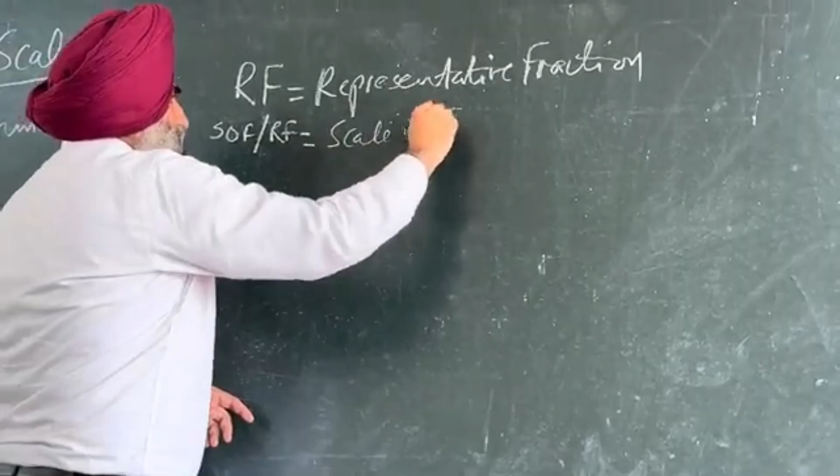In some of the books you will find the representative factor also. There is another term, SOF. SOF is the same thing. SOF and RF are one and the same thing. But SOF is scale of factor. This decides which type of scale is there. So this is the normal size.

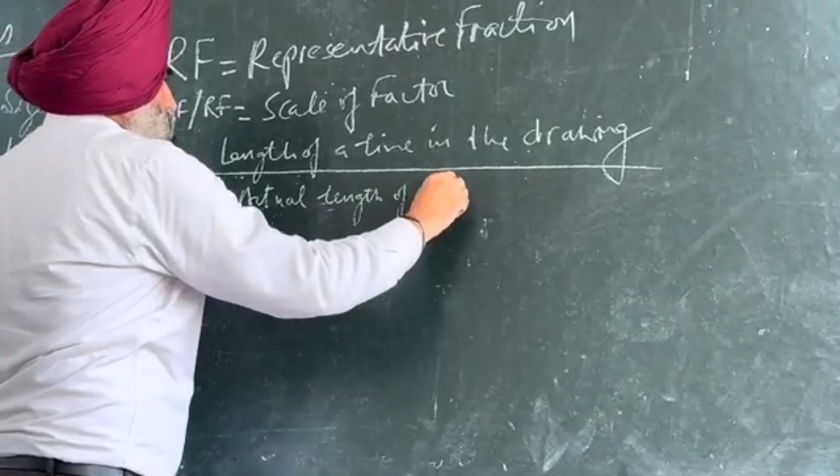Normal size, RF, this is the definition of RF: length of a line in the drawing to the actual length of the object.

Actually this 1:1 is 1/1. Am I right or wrong? It's also called 1/1. What is 1? 1 means length of a line in the drawing. What is on the right hand side of this dot? It's a ratio - this is the actual length of the object.

If I say 100:100, it is nothing but basically 1:1.

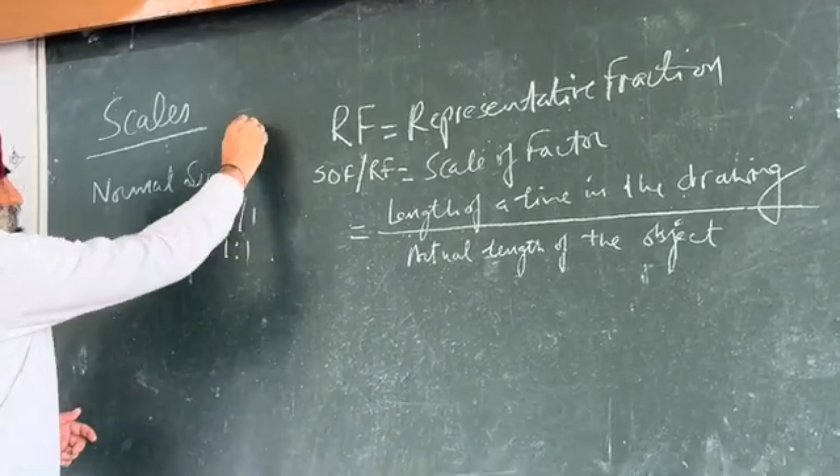And so far what we have discussed, what is the minimum dimension which can be measured with the help of a drafter? Minimum dimension is millimeter. And if you write down capital M, this becomes mega, 10 to the power 6. So please don't write capital MM. This is small mm, millimeter.

This is the representation by which you can make use of mm. Another size, another one, then reducing size or reducing scale. What is that?

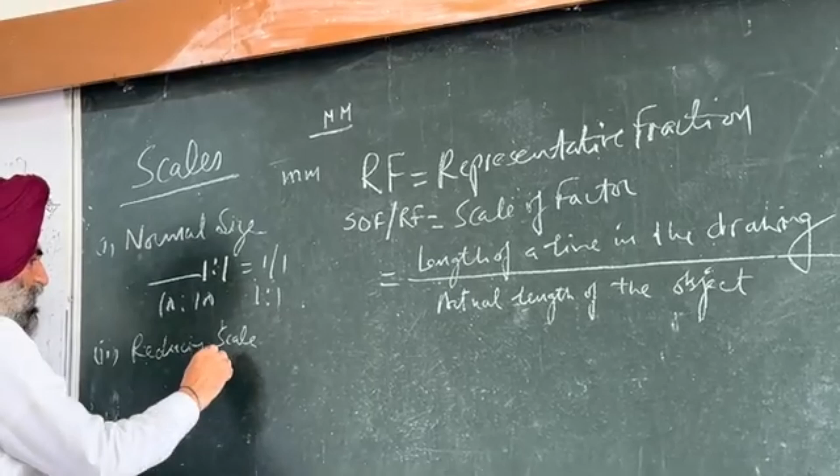This is 1:x, where x is greater than 1. Let us assume I write down 1:2. Here x is greater than 1. Is it okay? What does it indicate?

It indicates that length of a line in the drawing is 1 and actual length is 2. Basically, your actual length is 2 times that of the length of a line in the drawing. So here we make use of a reducing scale. And the third one, if I write down 1:100, what does it indicate?

Length of a line in the drawing is 1, actual length is 100. If it is 100 centimeters, it is represented by 1 centimeter. Is it okay so far? Does anyone have a doubt?

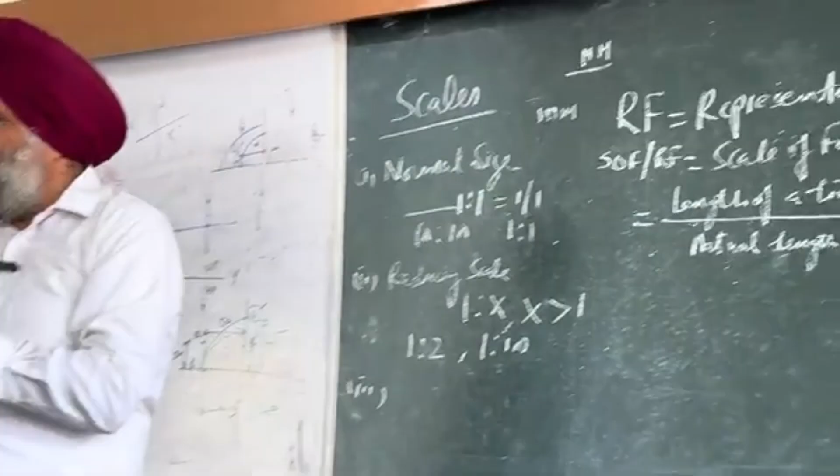Another thing is called enlarging scale, or enlarging representation, or enlarging size. You can use any of these words here.

X ratio to 1, where x is greater than 1. If I write down 2:1, what does it indicate? It indicates that length of a line in the drawing is 2 and actual length is 1.

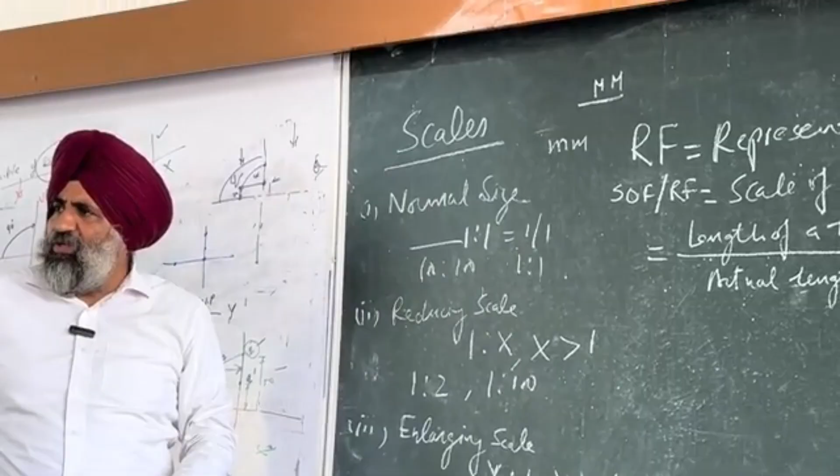Very limited, you will make use of this enlarging scale. When do we use the enlarging scale? When we have a very small dimension, and you are left with more space available on the sheet, in that case you can make use of this enlarging scale.

Now here, if I write down 100:1, what does it indicate? Length of a line in the drawing is 100, actual length is 1. This is a very, very important definition.

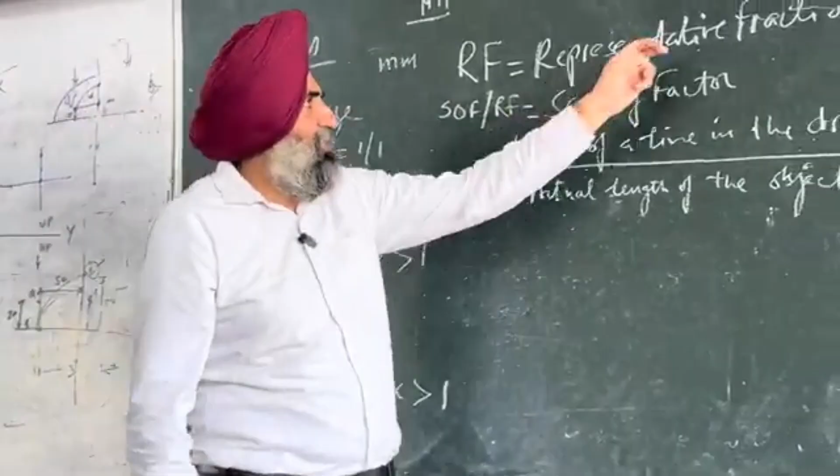Representative fraction. In some books you will find representative factor also, but this is basically a representative fraction or scale factor. This is one and the same thing - length of a line in the drawing to the actual length of the object. There are two things which are important in the case of scales.

There are 6 types of scales which are there. There are 6 types of scale which are there. One is plane scale.

Another one is diagonal scale.

Another one is comparative scale.

Another one is Vernier scale.

Another one is isometric scale.

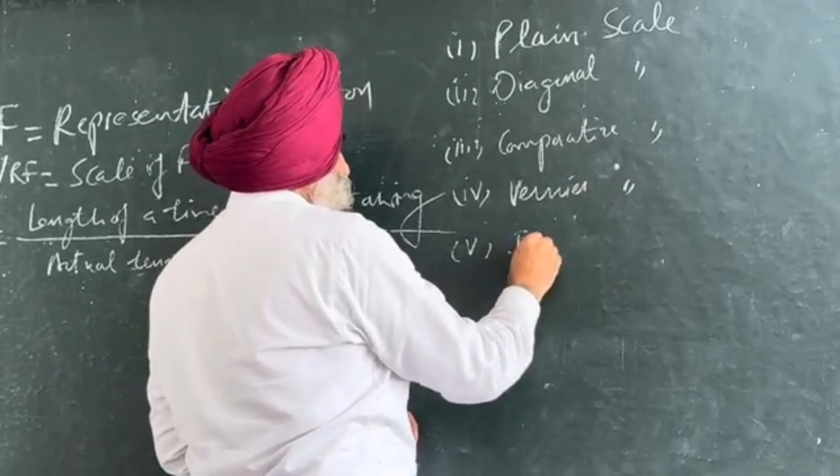Another one is scale of chord. We'll discuss only the first two in our class.

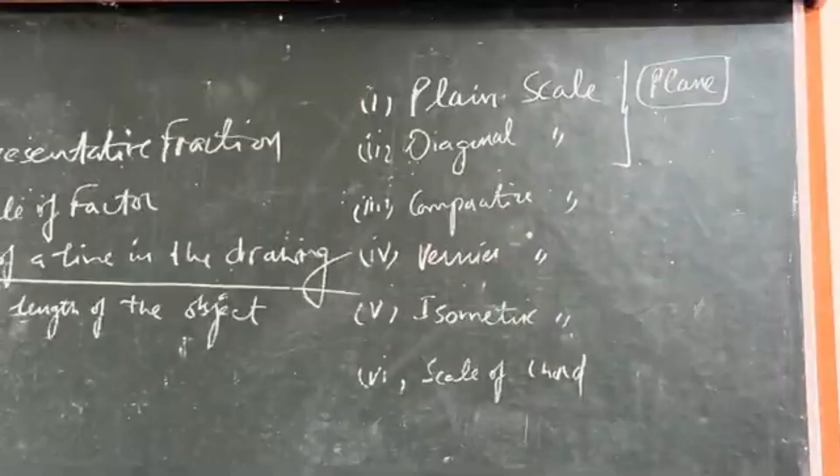We'll discuss these two in subsequent classes. Today, don't write down 'plane, plane scale' confusedly. This is 'plane' (flat), this is 'the plane' (geometric plane). So we'll discuss the first two in our class.

The rest are not in our syllabus, but if you are interested, we'll share the information with you later on also. Now, in plane scale, if you are going to measure meter, centimeter...

If you are going to measure up to 2 units - meter, centimeter, or meter, basically meter, decimeter, centimeter, millimeter - at a time you are choosing only two: meter-decimeter, or decimeter-centimeter, or centimeter-millimeter. Then you can use plane scale.

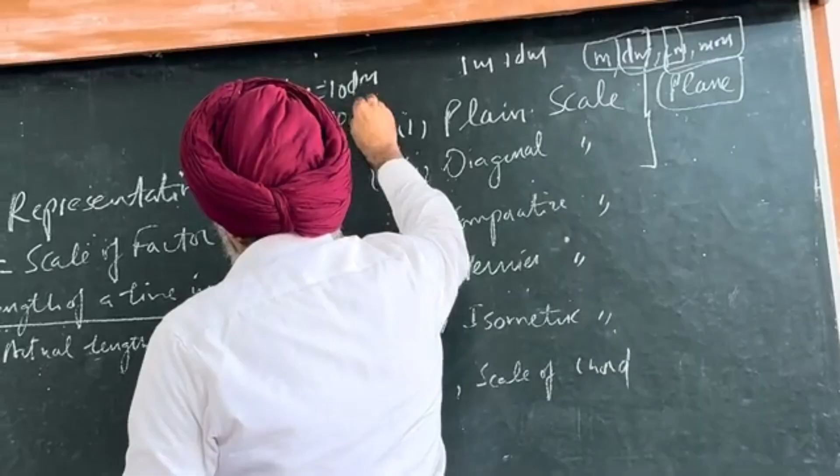Is it okay? 1 meter equals 10 decimeters. 1 decimeter equals 10 centimeters. 1 centimeter equals 10 millimeters.

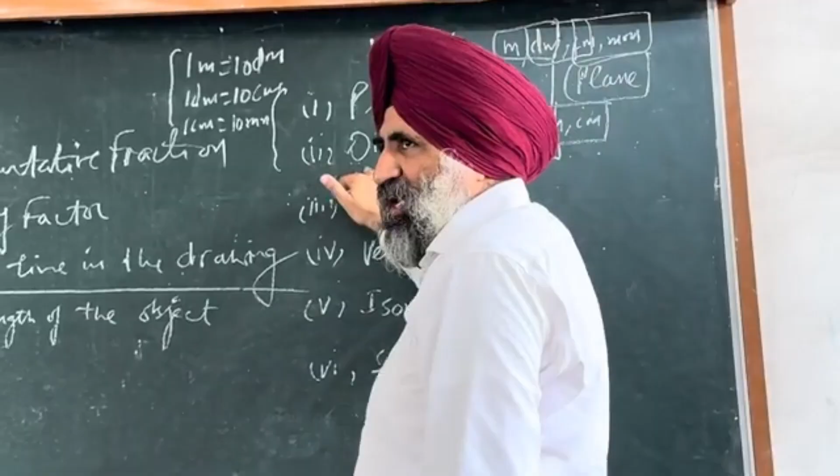If you look here, only two dimensions are used: meter-decimeter, or decimeter-centimeter, or centimeter-millimeter. So here you can make use of the plane scale. Another thing, if the dimensions are meter, decimeter, centimeter - you are using three components simultaneously, meter, decimeter, centimeter - here you make use of the diagonal scale.

Or decimeter, centimeter, millimeter - again this will make use of a diagonal scale.

And when you are doing the comparison between time and distance, when we are making the comparison between time and distance, you can make use of the comparative scale.

This isometric scale - iso means equal, metric means measurement. When we are going to measure all three dimensions, length, breadth and height, that becomes the isometric scale. The beauty of this one is you will get all three dimensions, length, breadth and height, in a single scale - that is called the isometric scale.

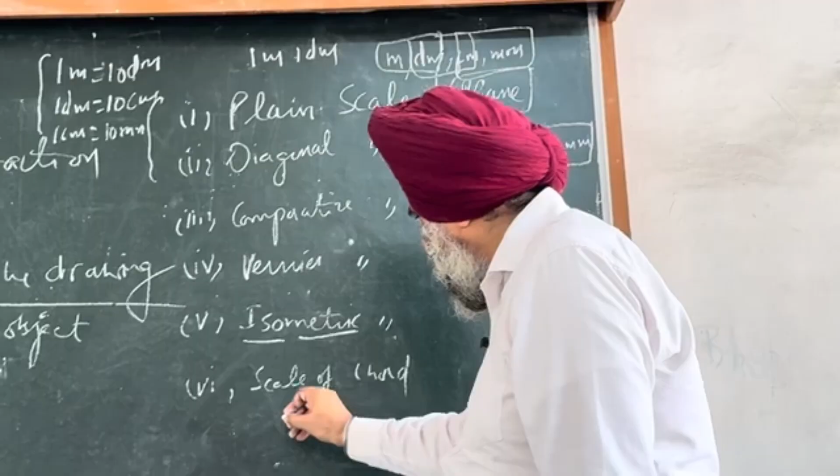Scale of chord - what is a chord? If you look at this circle, if you take 2 points on a circle and join it with a straight line, and this straight line should not pass through the center of the circle, this is called scale of chord.

And if I put down the AB symbol like this, this becomes the arc. So this is the difference - here you can make use of the scale of chord. This is the basic principle.

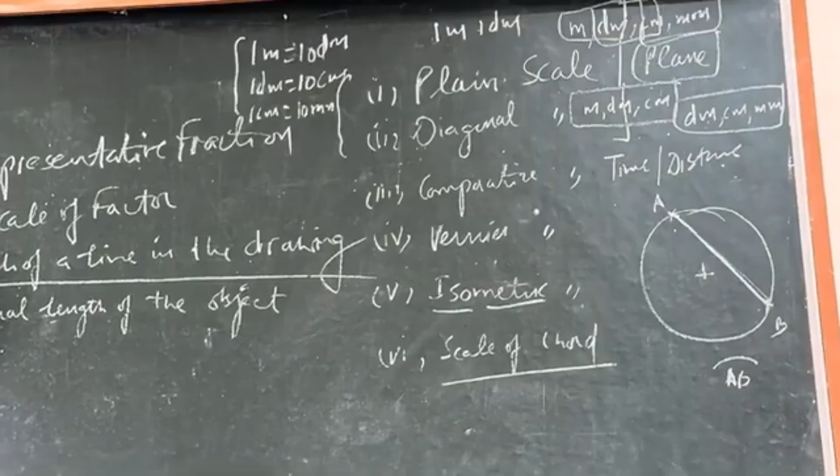In detail we will discuss this plane scale and diagonal scale. Is it okay? So how to draw plane scale and diagonal scale, we'll take one or two examples each.

May I erase it? And you can write down one problem related to that. Please write down one problem related to that, it will help you a lot. Construct a plain scale: construct a plane scale of 1 centimeter is equal to 0.5 meter.

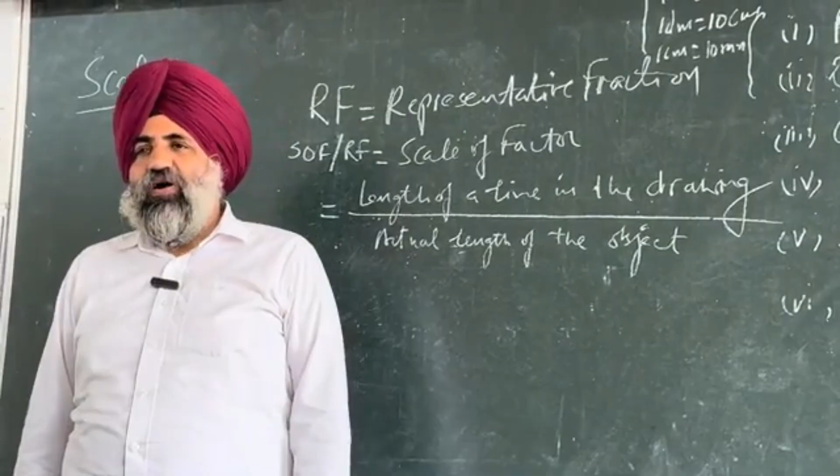Construct a plain scale of 1 centimeter is equal to 0.5 meter to show single meter, single decimeter, and long enough to measure up to 8 meter. Show a distance of 7 meter 5 decimeter and 6 meter 3 decimeter on it. Now how to solve this problem?

First of all, this is a plane scale problem. It is clearly mentioned this is a plane scale. Construct a plain scale. There are two things which are important before drawing any scale. First of all, you need to calculate RF. RF is nothing but basically the representative fraction.

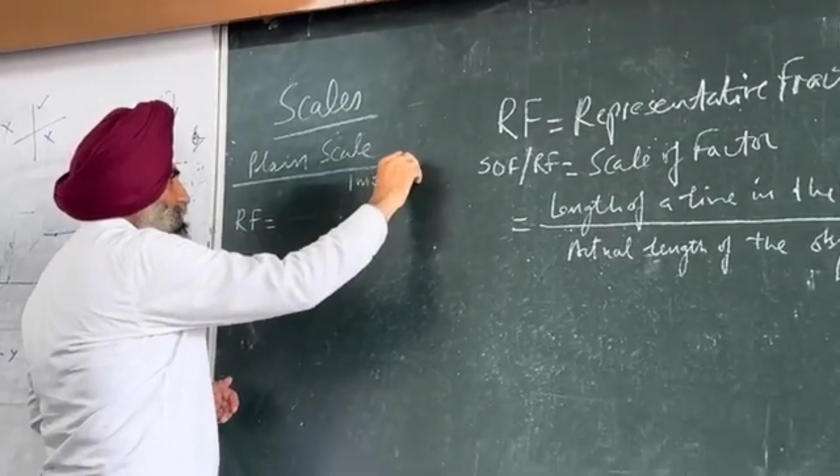Here 1 meter is equal to 0.5 meter. Now here basically this becomes 1 over, you will convert into this one, 1 over 0.5. Sorry, I have mentioned 1, not 1 meter. This is 1 centimeter is equal to 0.5 meter. 1 centimeter, it represents 0.5 meter. So what to do? 1 centimeter equal to 0.5 meter. 1 centimeter is equal to 0.5 into 100.

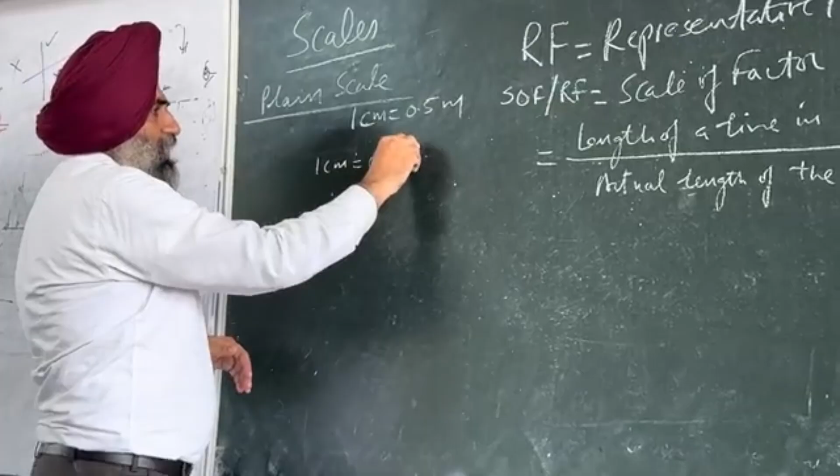Now both the units are same on both sides, is it okay or not? So here you will get 1 centimeter is equal to 50 centimeter. So your RF will be 1 over 50. Your RF is 1 over 50.

And what is LOS? This is called length of scale. This is the second parameter which is important. And the formula of length of scale is equal to RF into maximum distance to be measured.

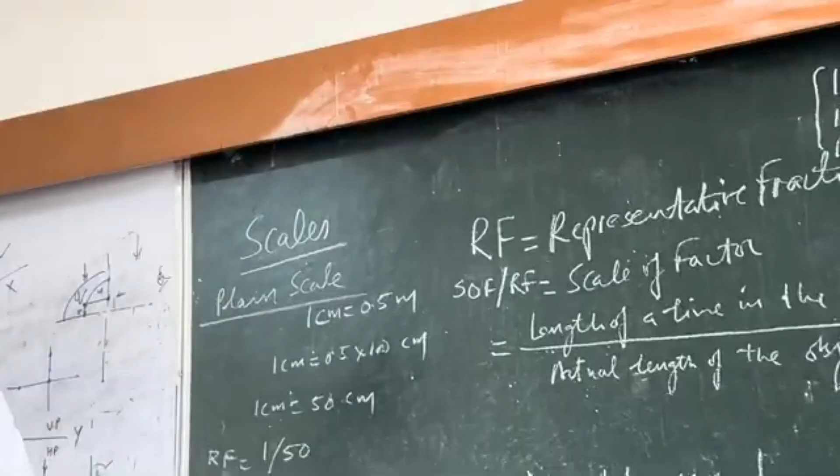And what is RF? 1 over 50. And here maximum distance to be measured is 8 meter. Into, what are the units of RF? No, this gets cancelled, centimeter gets cancelled with centimeter. So there will be no unit. This is the important part. There will be no unit of the RF.

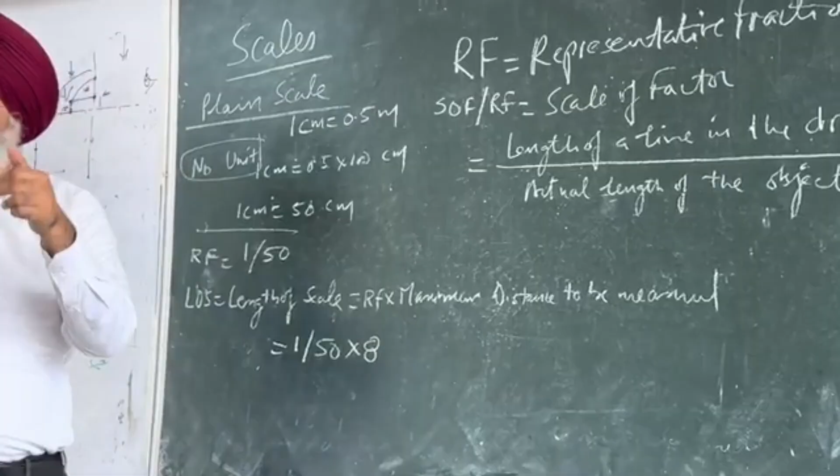It is applicable in all cases. And if this RF has no unit, what is the unit of this one? 8 meter. Can I measure meter value with the help of drafter? Does your drafter support the meter value? Your drafter does not support the meter value. What is the value it is supporting? Centimeter or millimeter. It is better if I multiply with 100.

It becomes the centimeter. If I keep on calculating, it becomes 16 centimeter. Now what do you have to do? First, may I rub it? Okay, I'm going to rub this one.

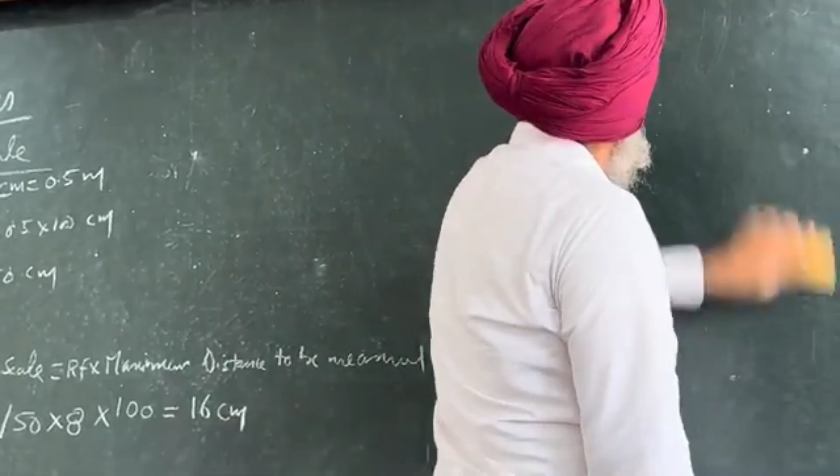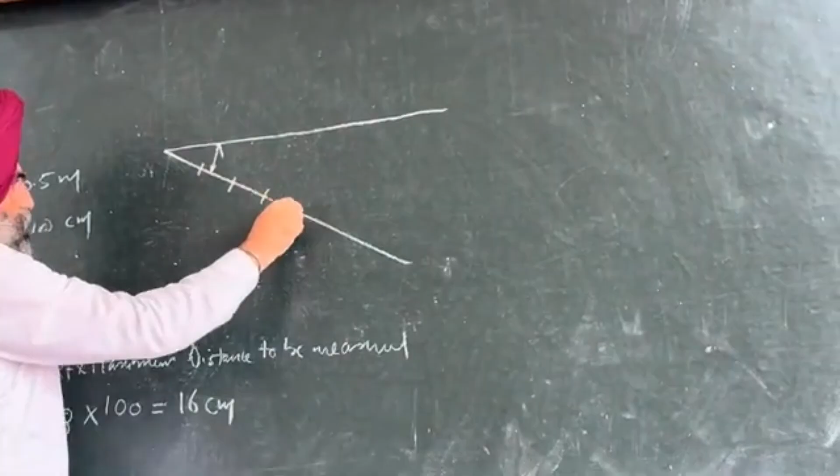Take a 16 centimeter line. Draw an acute angle. What is the beauty of acute angle? It is always less than 90 degree. And divided into 8 equal parts: 1, 2, 3, 4, 5, 6, 7, 8. Is it okay or not? Join this last part with this last one.

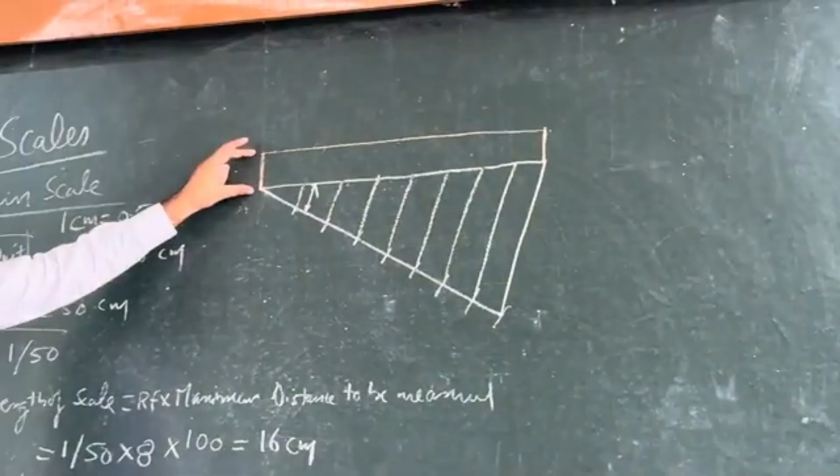Your drafter will be set parallel to this one. Draw rest of the line. Clear? Now here, take 1 centimeter or 10 mm. Basically it will look like a shape like this one. This is 1 centimeter or 10 mm. You will have a scale like this one.

Another thing, from here, drop the perpendicular. This is basically a perpendicular. Do it for all the points. Now what happens?

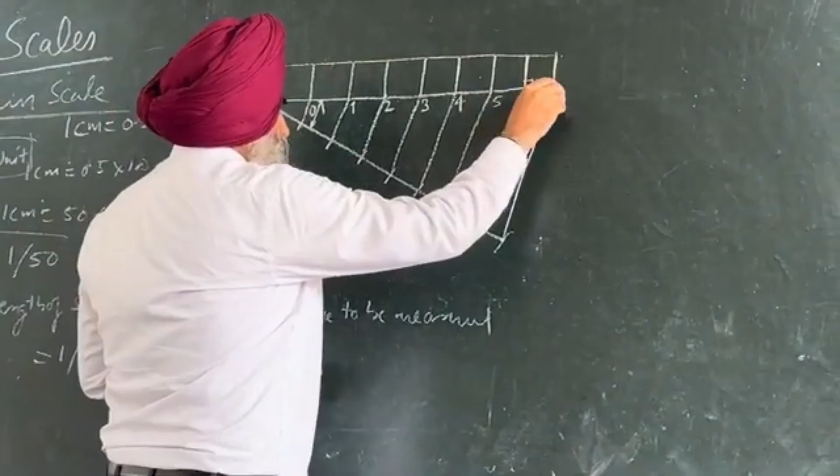If I do the numbering system from here, this is 0, 0 meter, 1 meter, 2, 3, 4, 5, 6, 7. It is in meter. It is clearly mentioned here. Can anybody read me the same problem again for me?

Construct a plain scale of RF 1 centimeter is equal to 0.5 meter to represent single meter and single decimeter, and long enough to measure up to 8 meter. Also show the distances of 7 meter 5 decimeter and 6 meter 3 decimeter. This is what I have asked.

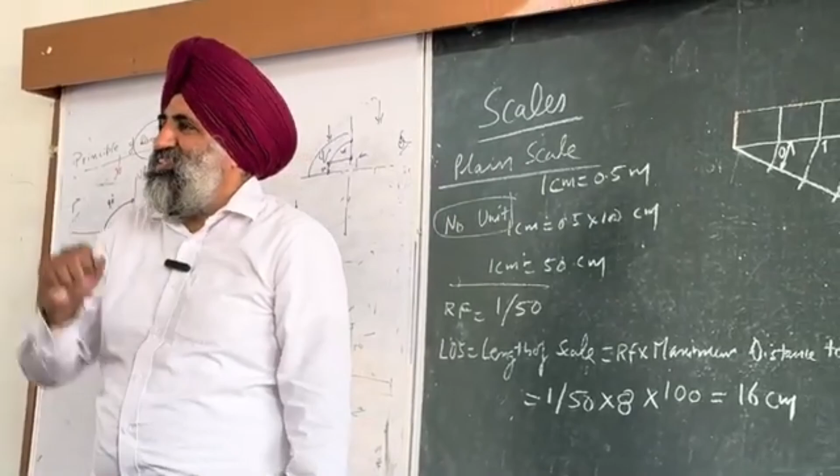Then divide this line into 10 equal parts. 1, 2, 3, 4, 5, 6, 7, 8, 9, 10.

When I join this point with this line, why have I started 0 from here? If I start the 0 from here, now I can measure all the dimensions varying from 0 meter to 8 meter, representing single meter and single decimeter. If I start 0 from here, I am going to measure only 8 meter.

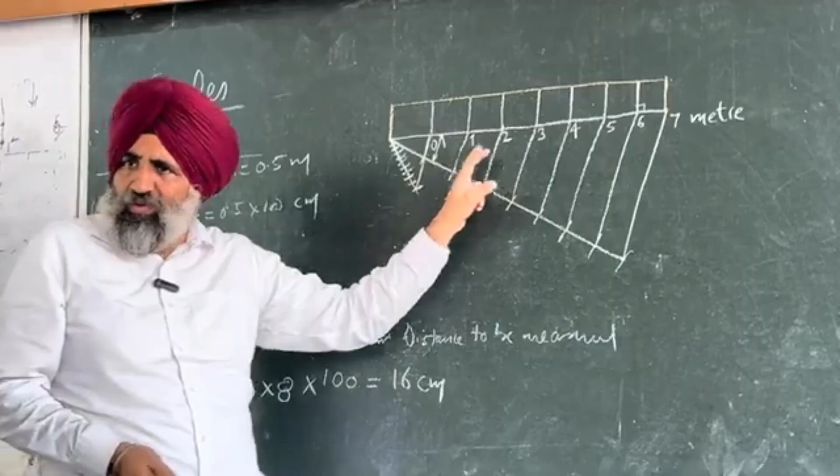So that is why we will always start 0 by leaving one block blank. We will give the numbering from here: 0, 1, 2, 3, 4, 5, 6, 7, 8. Now this is the line. Your drafter will be fixed according to this line. You will have parallel lines according to this one.

How many lines will be there? 10. Why? Because it represents a single decimeter. If I keep on joining single decimeter 10 times, what will happen? It will become 10 decimeter, and 10 decimeter is equal to 1 meter.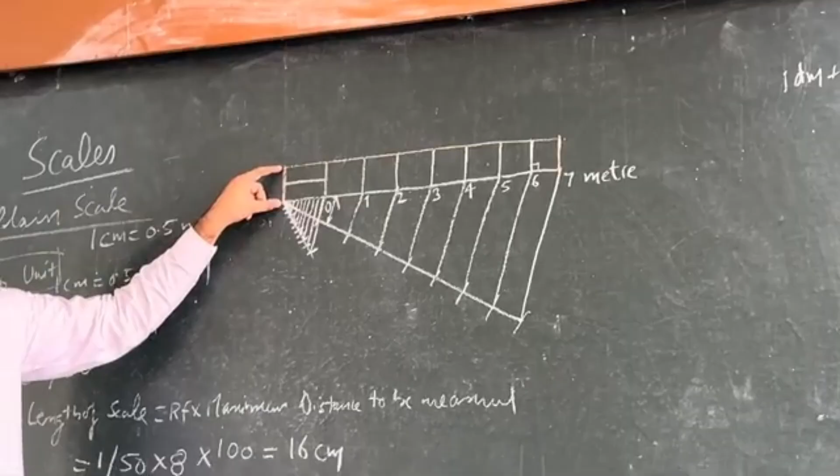So you will put a center line in between, dividing this into 2 equal parts. Now you will have a line like this one. Make again the perpendicular lines from these points.

These are 10 in number. Another thing, this represents your meter, single meter. When I divide into 10 equal parts, this becomes 10 decimeter.

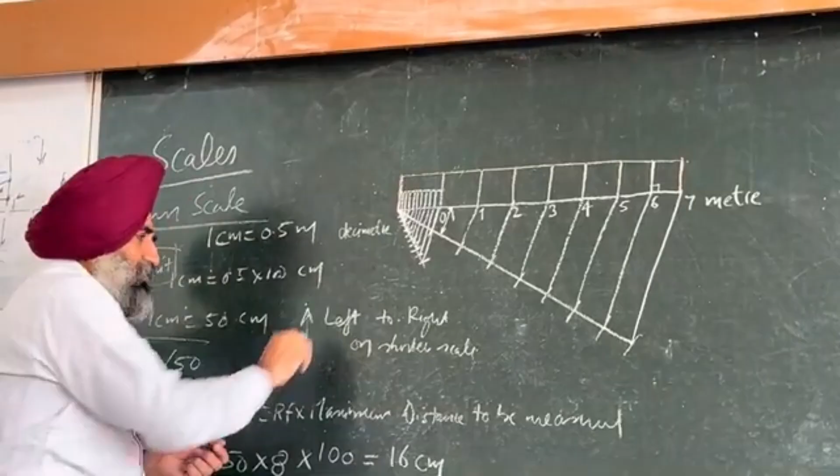When I move from right to left on the shorter scale, the value will increase. When I move from right to left on a shorter scale, your value will increase.

This is 1 decimeter, 2, 3, 4, 5, 6, 7, 8, 9, 10. You will have 10 lines: 1, 2, 3, 4, 5, 6, 7, 8, 9, 10.

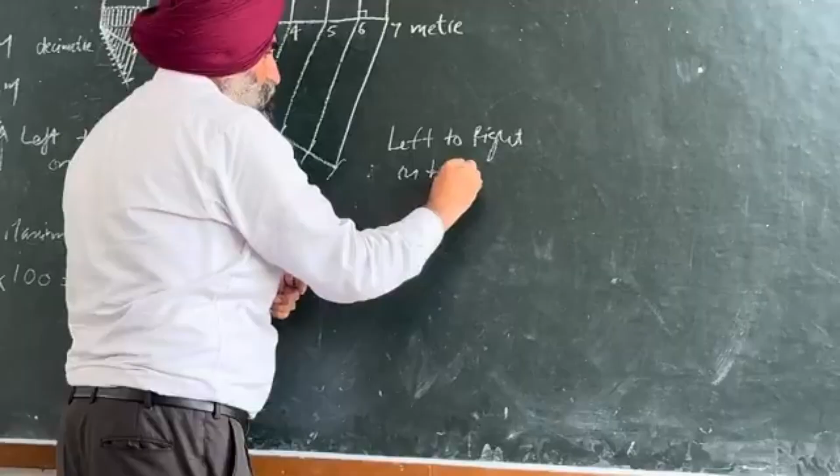Similarly, when you move from left to right on the bigger scale, your value will increase. 0 is here, 1 is here, 2 is here, meaning it is increasing.

This is from right to left. This is from right to left. I have mentioned right to left. Now look at here.

You are going to represent 7 meter. This is the 7 meter. Up to here, this is 7 meter: 1, 2, 3, 4, 5. And leave in between some distance.

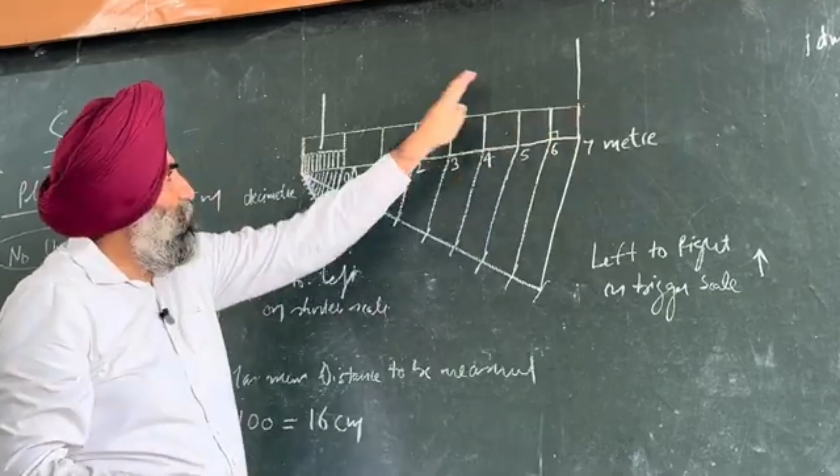Yesterday we have already discussed the principles of dimensioning. Again we are making use of the extension line. Whatever we learned yesterday in class, we are going to apply today in class. Now, this is the dimension line.

Rub it, don't make it beyond 2 or 3 mm. This is 7 meter 5 decimeter. I have committed one mistake.

Initially I have to show the smaller one, then the bigger one. What is the smaller one? 6 meter. 6 meter is the smaller one. 6 meter here, then 3 decimeter. This is the 3 decimeter. First of all, show the smaller one, otherwise...

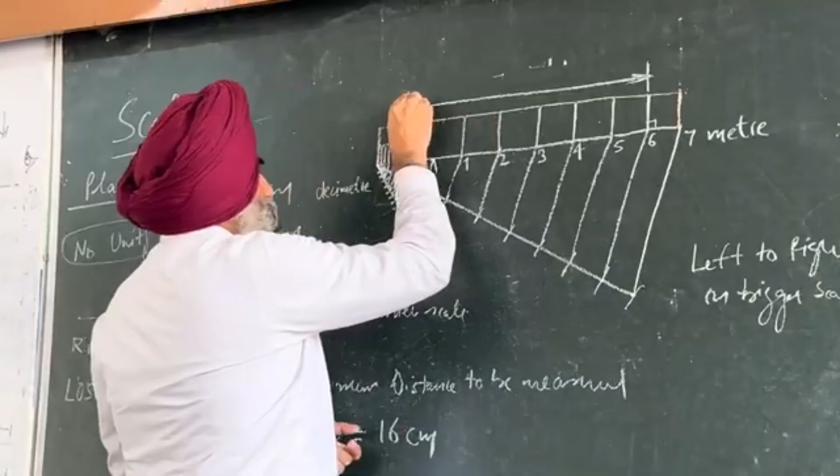3 decimeter. And here it is 7 meter 5 decimeter. 7 meter 5 decimeter. And another thing, this is all about your problem.

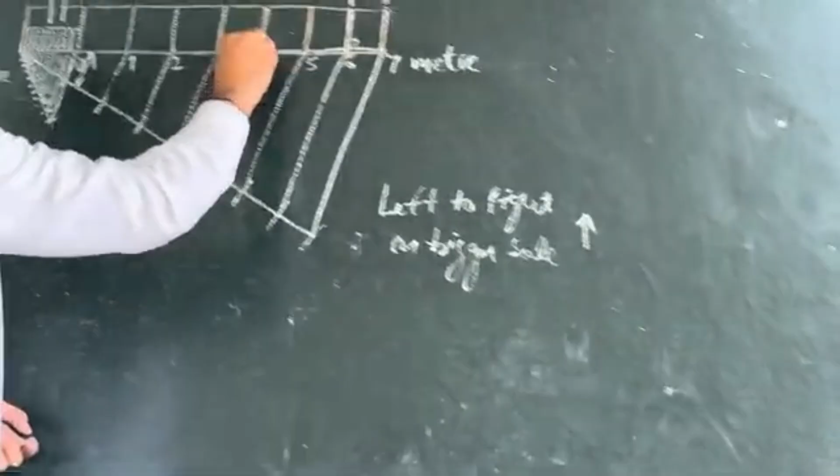What are the parts which have to be dark? Only this color chalk is the dark one. For your convenience, you can draw these also dark, these lines which represent a meter. Or some of the lines related to this one, few of the lines you can also show. So this is all about your problem.

Another thing, you are going to write down, this is the darker one. Make use of this one. This is the darker one.

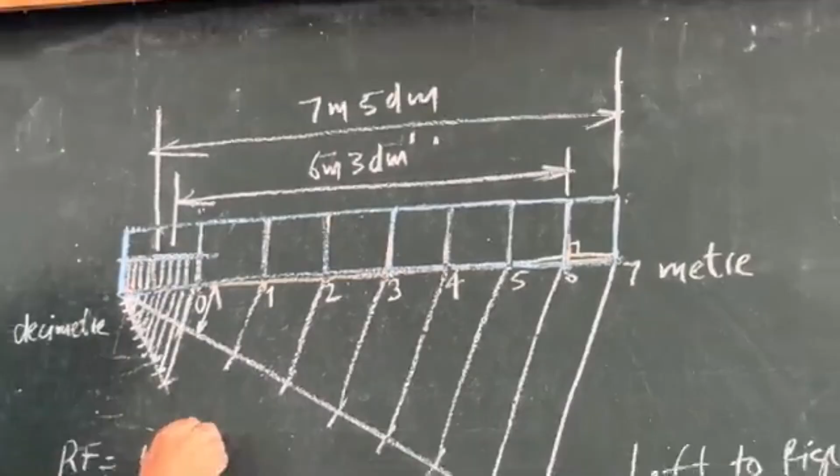Now what are the things which you have to write? Please write down RF here. This space, the RF was 1/50. Make use of the guidelines and then write down 1/50. Then what is LOS? LOS is 1/50, and show all the calculation: 8 into 100, it equals 16 centimeter.

Again make use of the guidelines. When you are comfortable on it, then you can ignore. Otherwise, make use of the guidelines. Is it clear? These are the things which you must write down.

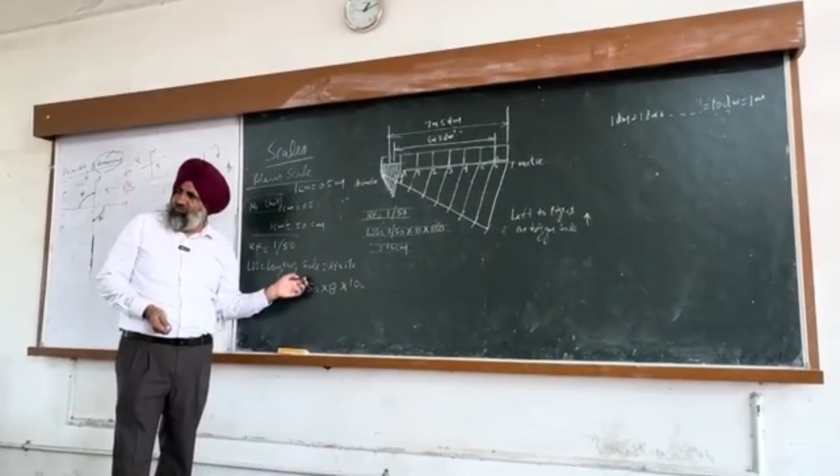Here, the space which is left here, you can draw this one. Earlier you can make the calculation in rough, and later on you can shift all the value. If you don't write down these values and you are able to draw this one, you are not able to get the full credit. Because only once you are able to make use of these things can you draw this one.

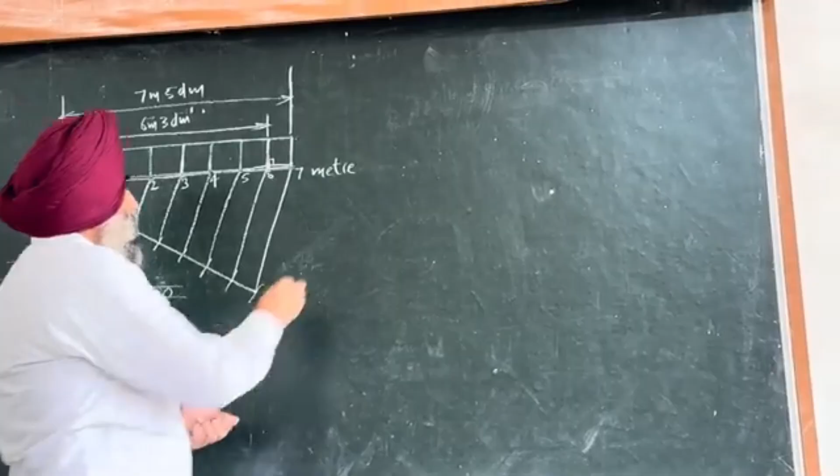Now we'll take the same problem. If you write down meter, decimeter and centimeter, this becomes the diagonal scale. Again we are using the same scale.

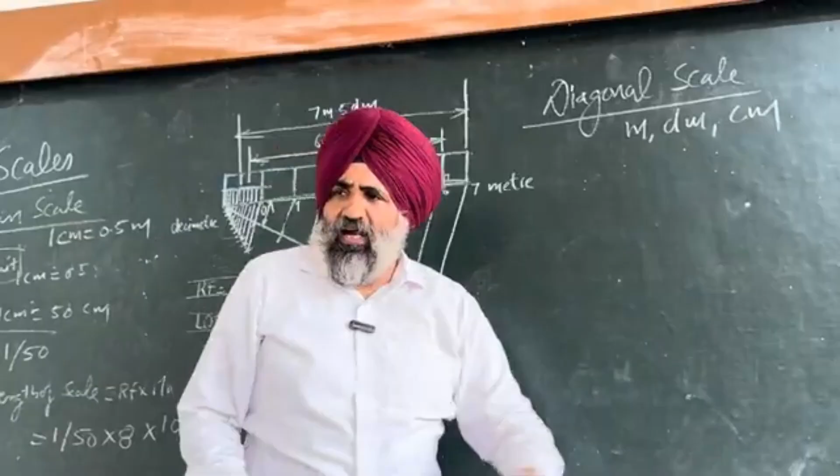Construct a diagonal scale of RF where 1 centimeter is equal to 0.5 meter. I'm making use of the same statement we discussed earlier. The values are 7 meter, 5 decimeter and 3 centimeter.

This is the one thing which we have. Another one is 6 meter, 4 decimeter, 2 centimeter. Now these are the two things which we are going to show here.

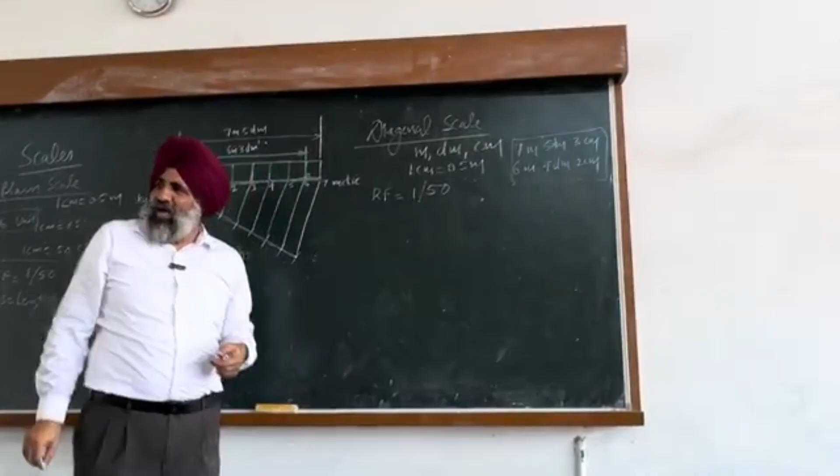The RF is 1 over 50. What is your LOS? Again LOS is 1 over 50 into 8 meter into 100 centimeter. It becomes 16 centimeter. Is it okay so far or not?

Okay, now what you are going to do? Take a 16 centimeter long line.

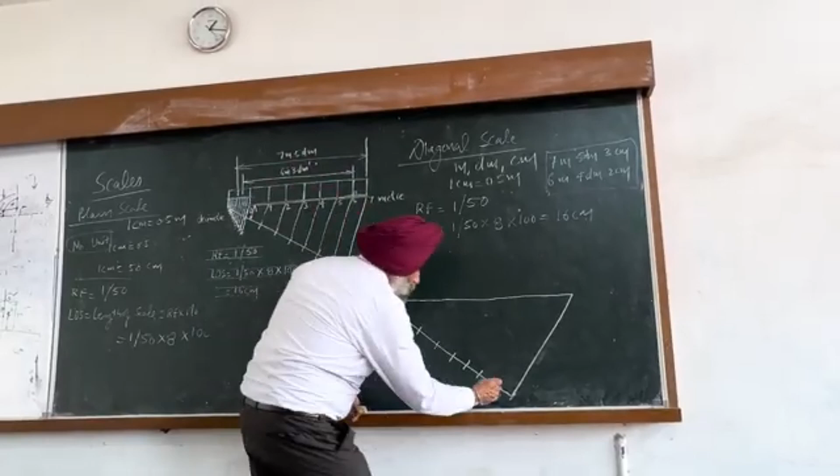Again divide it into 8 equal parts: 1, 2, 3, 4, 5, 6, 7 and 8. Join the last line with this point. Now your drafter will be fixed according to this position and draw the rest of the lines parallel to this one.

Is it okay so far or not? Now, because this is the diagonal scale question, to have more clarity, instead of 1 centimeter let us have 3 centimeter.

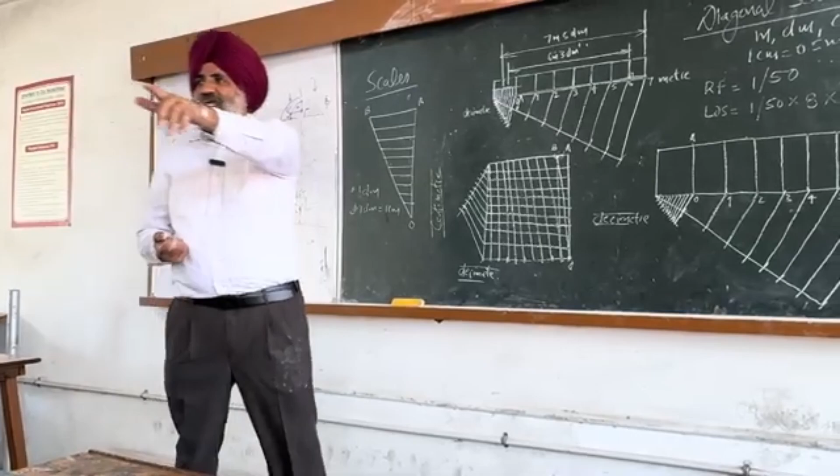But actually what happened, this point is obtained, a slanting line will form. Do it for rest of the 1 2 3 4 5 6 7 8 9 10. Understood or not?

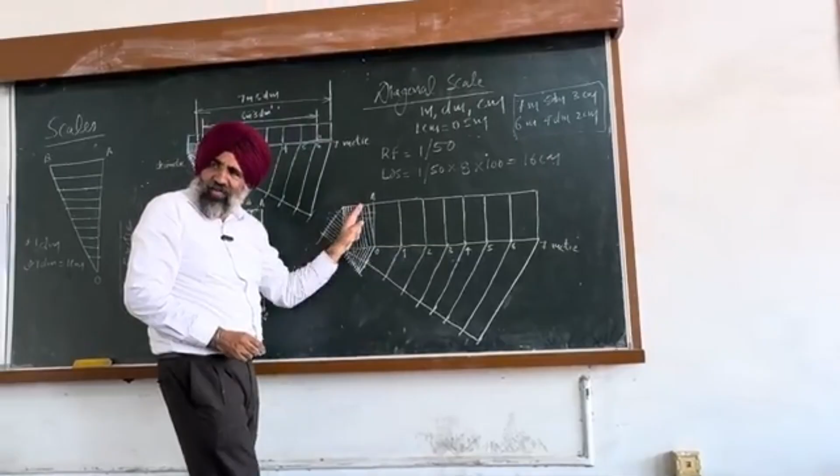Your drafter is fixed now, parallel lines, and here - parallel to this line, here it is not a slanting line, here it is a parallel line. Mind it, keep this in mind, children.

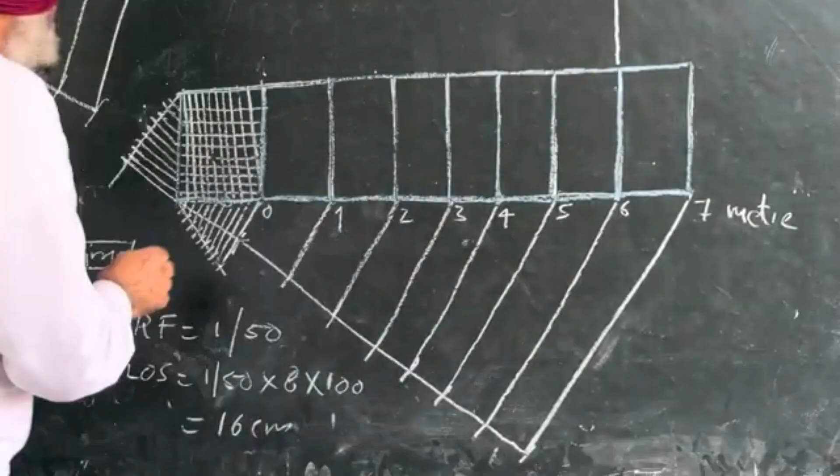Take it this way, a straight perpendicular line, because it's 2 centimeters. When I move from lower to upper, when we move from lower to upper on a centimeter scale your value will increase in steps, meaning the steps in which you are going to divide - here we divided into 10 equal parts. Understood or not? Now from here when you did this, this became your part, and this becomes...

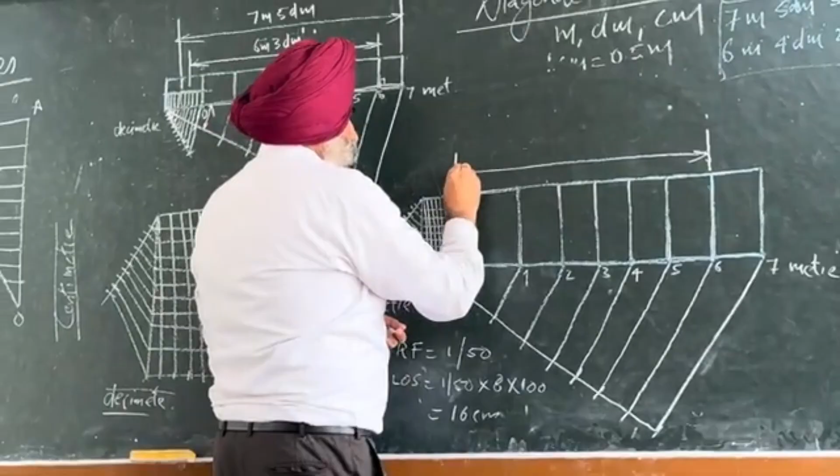Make use of the principles of dimension: 6 meter, 4 decimeter, 2 centimeter. Clear. Now another thing we will take.

Another one, 7 meter up to here, this is 7 meter, then after that 5 decimeter - this is the fifth line, here it will become the 6 decimeter, 5 decimeter and 3 centimeter, this is the third one. Make use of a circular small circle, this is the dot. From here again drop the perpendicular, this becomes...

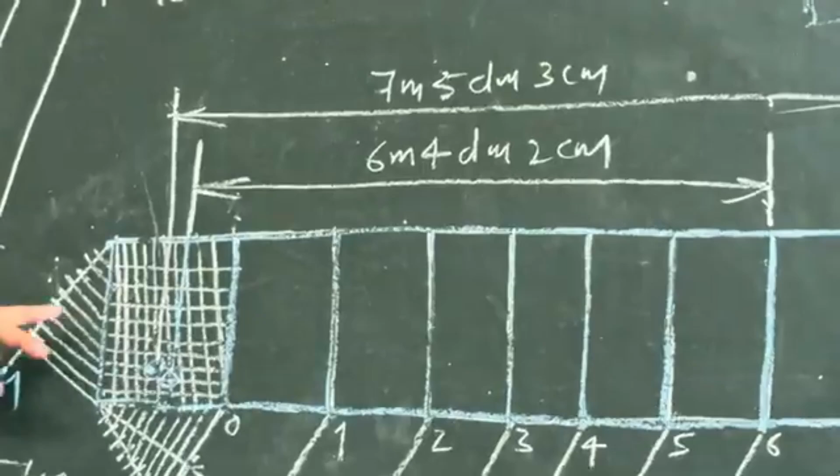7 meter, 5 decimeter and 3 centimeter. Students, I've shown this large view separately so you understand the steps. When it was 2, this was the 2 centimeter, when it was 3, this is the 3 centimeter. Here it becomes 9 centimeter, and here 10 centimeter, but it becomes 1 decimeter, because above a single decimeter, you'll complete 1 full decimeter. So when 10 centimeter is equal to 1 decimeter, that is 0.1 meter.

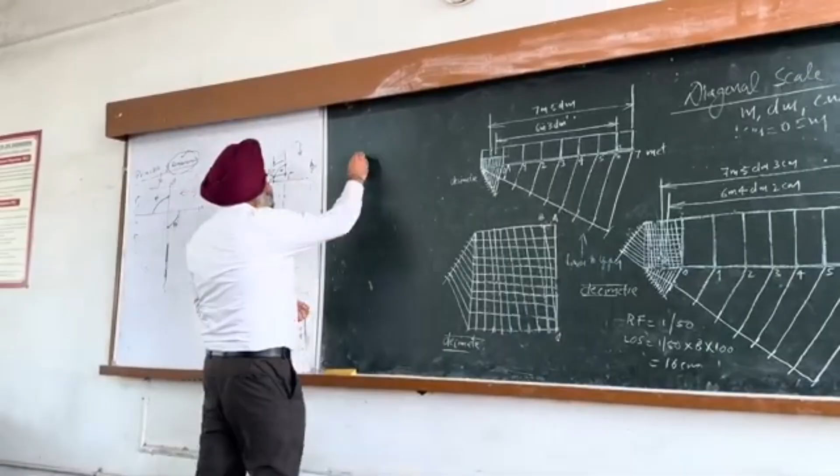Let me rub this a little bit here, and make use of this one, this will help you. A rectangular plot of 25 square kilometer is represented on a certain map by a similar rectangle of area 1 square centimeter.

Clear? Now draw a plane scale. What scale do we need to make? Plane scale to show 10 kilometer and single kilometer on it, and long enough to measure up to 80 kilometer.

So first, children, we need to find the RF and LOS. To find RF, take a square root of this one. This becomes 5 kilometer is equal to 1 centimeter.

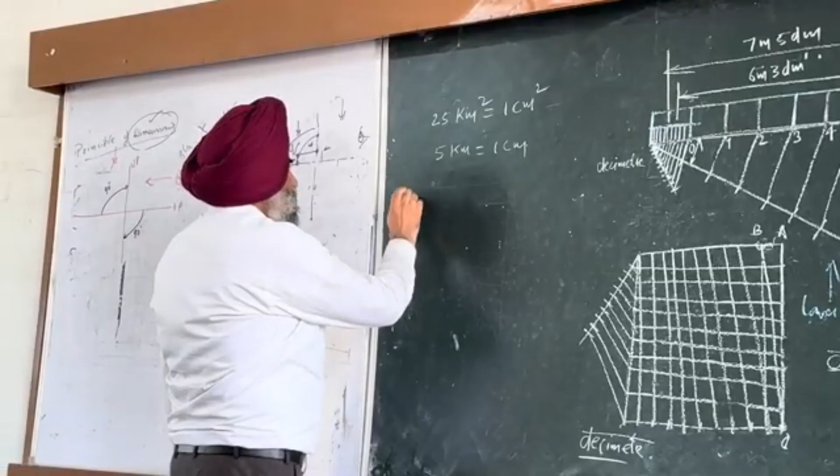Now you can write what is RF? RF is 1 over 500000, 1, 2, 3, 4, 5 — figured it out. This is the RF.

2, 3, 4, 5, 6, 7, 8, 9 — let's set the center line. 3, 4, 5, 6, 7, 8, 9. Now this represents single kilometer.